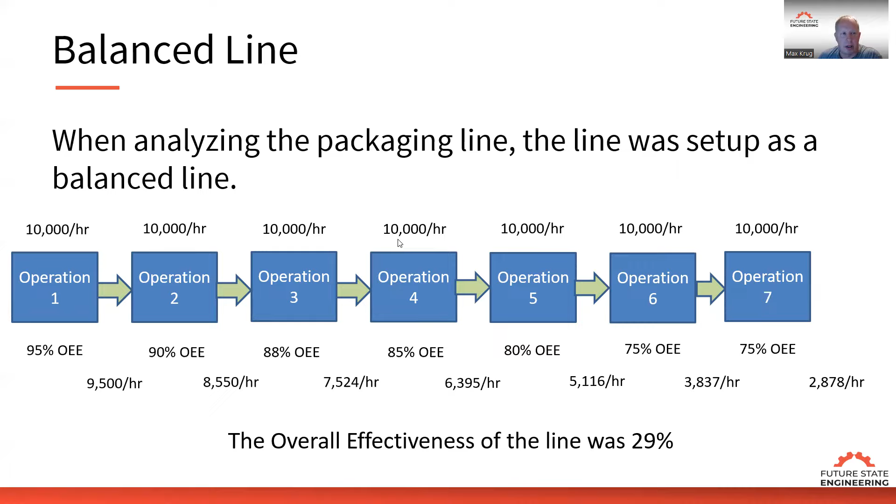So how do we improve this dramatically in a short period of time without doing a ton of effort? When we look at a balanced line, the characteristics of a balanced line, in most cases, delays are transferred to the downstream processes and gains are usually never transferred. So why is that? In this case, what happens is we have variation and we have dependencies. The dependencies are the operations are tied together physically with very little inventory between. And of course, the variation is the minor stoppages that we were seeing.

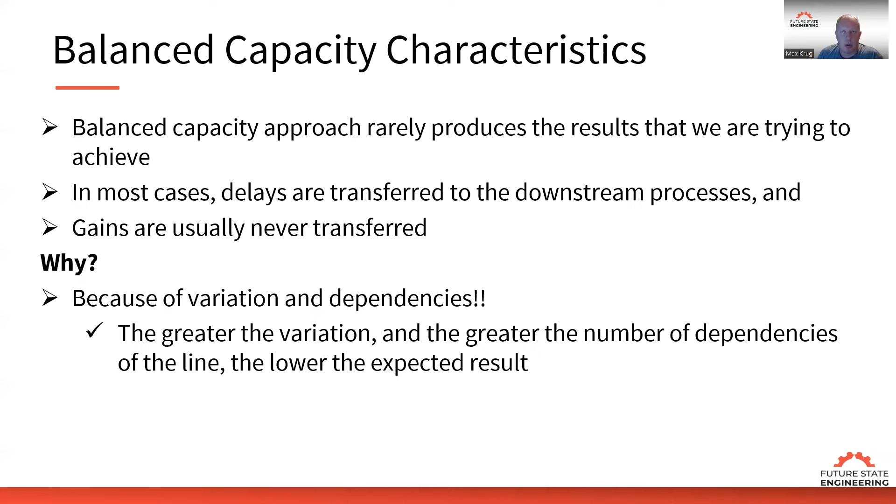And what happens is the greater the variation or the greater the number of dependencies, the lower the expected result. So if I were to add a couple more operations to the end of that line that had even 90% OEE, the output would be less than the 2,900. So we've got to figure out, how can we improve this system? And so due to that variation and the dependencies, the minor stoppages were causing huge line productivity issues.

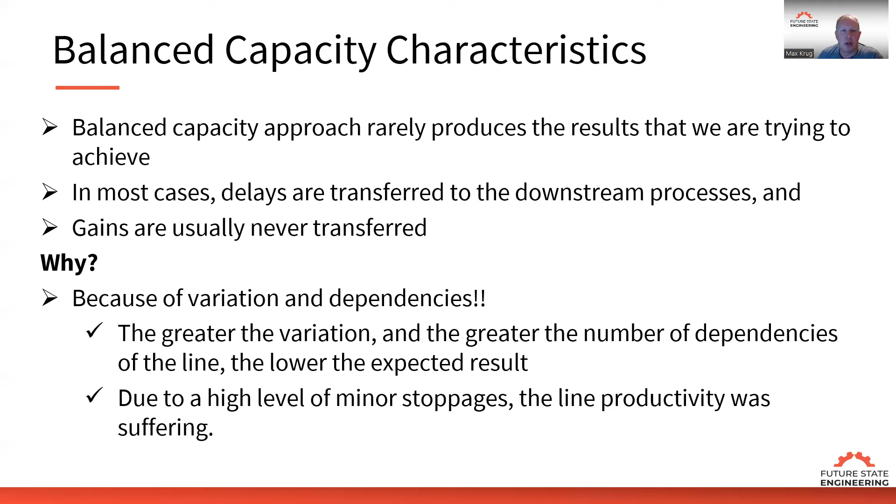So what's the solution? What I did is I started to look at, how can we unbalance the line? When we unbalance the line, what we're doing is we're reducing the dependencies between the operations, and we're not even looking at the variation right now. We're looking at just reducing the dependencies.

And so the front of the line, we're still running at 10,000 units per hour and the same OEE, so 95%, 90%, 88%. And then what we did is we actually slowed the fourth operation down to 7,000 units per hour. So people were like, what are you doing? But the other thing that we did is we put some inventory in front of operation 4 and after operation 4.

Now this is a buffer. We're using inventory as a buffer here to decouple operation 3 from 4, and also inventory as a buffer to decouple our operation 4 to 5. So why is that important? So just by putting this buffer in place, now I'm preventing delays from upstream stopping operation 4. So even though I slowed it down, by eliminating those disruptions, the OEE on that operation goes up because I don't have the dependencies and the variation coming downstream to stop operation 4.

So in that case, if we're running 7,000 an hour at a 90% OEE, the output goes to 6,300. And then because we have the buffer of inventory between 4 and 5, delays from operation 4 aren't causing operation 5 to stop. So now at that rate of OEE of 90% on 6,300, their output goes to 5,670, and then 85% on operation 6 goes to 4,820, 85 on operation 7 goes to 4,097.

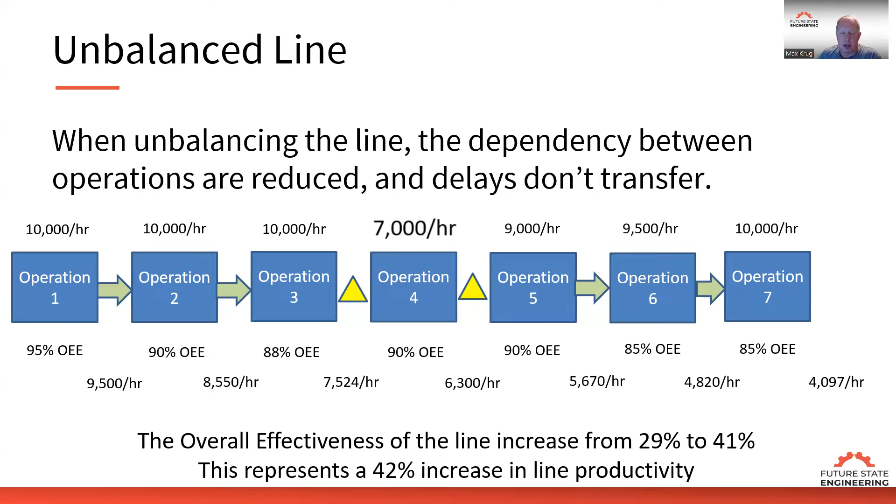And again, my general rule of thumb is we want a minimum of 20% protective capacity in all other operations above the pace setting operation. So in this case, we had 30% and maybe a little over 20%, but that's important so that delays from the upstream don't cause operation 4 to stop, and that the downstream operations can pull the work away at a faster rate.

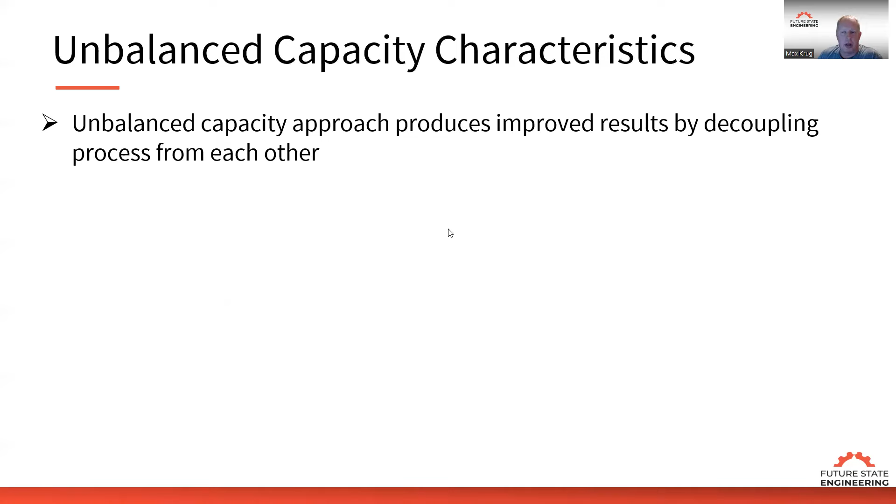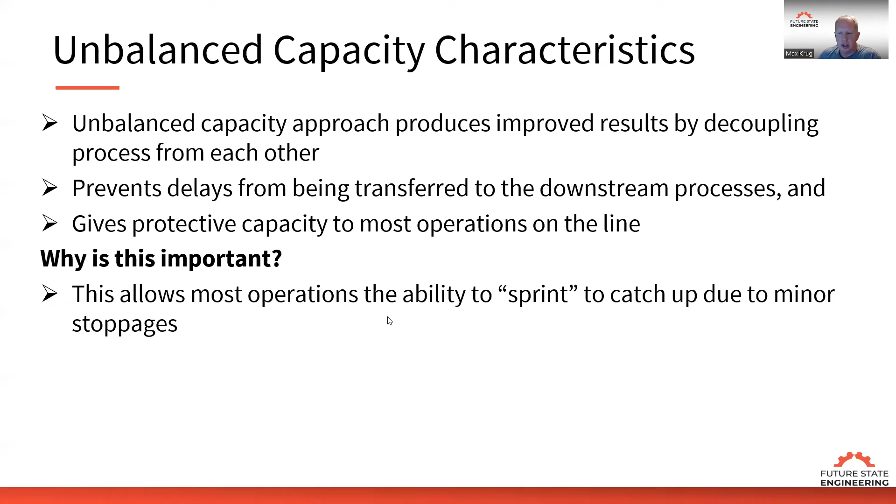So what are the characteristics of an unbalanced line? We gain improved productivity by decoupling. This prevents delays from being transferred downstream and gives protective capacity to most of the operations on the line. So why is that important? This allows most operations to sprint, which means we can run at a faster rate to catch up when we have minor stoppages. And upstream operations can build that inventory buffer back up before it stops the pace setter operation. So we need that sprint capacity to run faster to build the buffer.

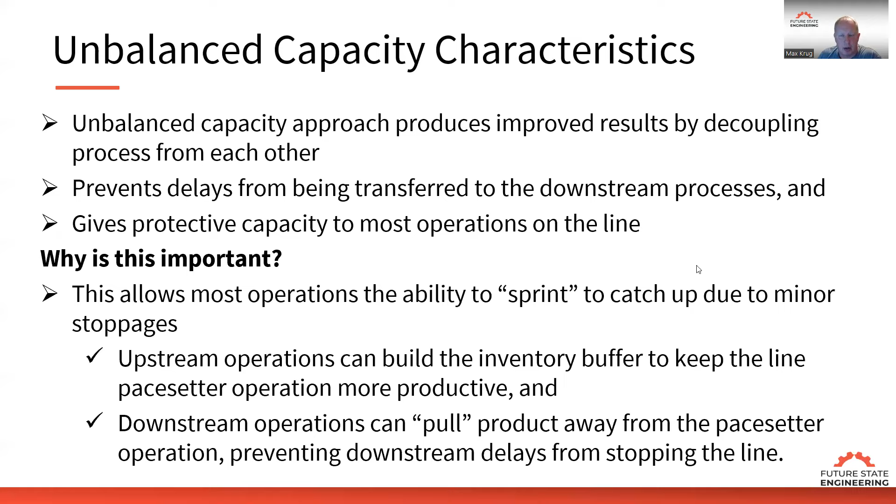And then the downstream operations can pull product away from the pace setter, preventing downstream delays from stopping the line. So that's the importance of unbalancing the line. And again, we can get immediate impact. Now, this isn't where we stop. The next step is to focus. So where do we focus?

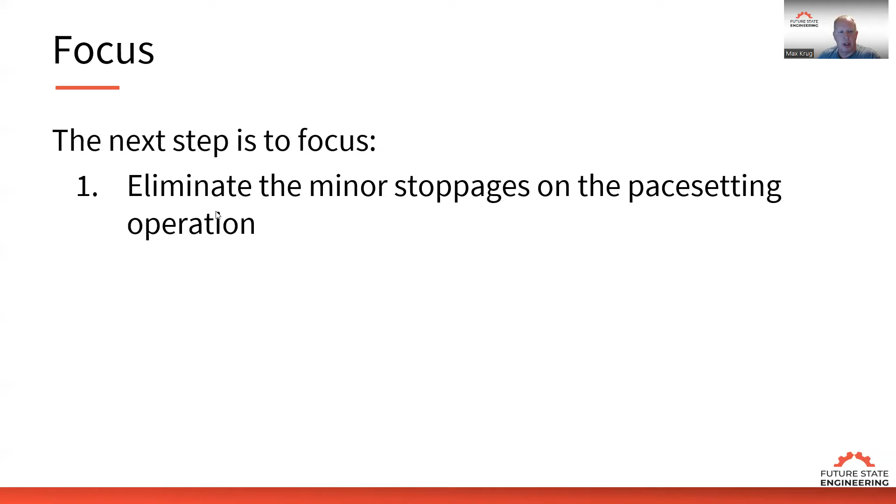So first, let's eliminate the minor stoppages on the pace setter operation. So what's causing those stoppages? We did a failure modes and effects analysis to figure out what was causing the stoppages, and we started focusing on eliminating those failure modes. Then once we get the pace setter operation running more effectively, let's find out which operation is causing the most of what we call holes in the buffer, which is what's preventing the buffer from being rebuilt before the line stops. So we take statistics on which operations are causing the biggest holes in the inventory buffer, and that's where we focus next, on improving the productivity of those operations.

And then we systematically do that through the whole line to improve the overall effectiveness of the whole line. So it's not uncommon to see the output of this line go up significantly. I know this company had a record day, and the record day was typically about 3 times what they were doing previously when they had the balanced line. So the output went up 3x.